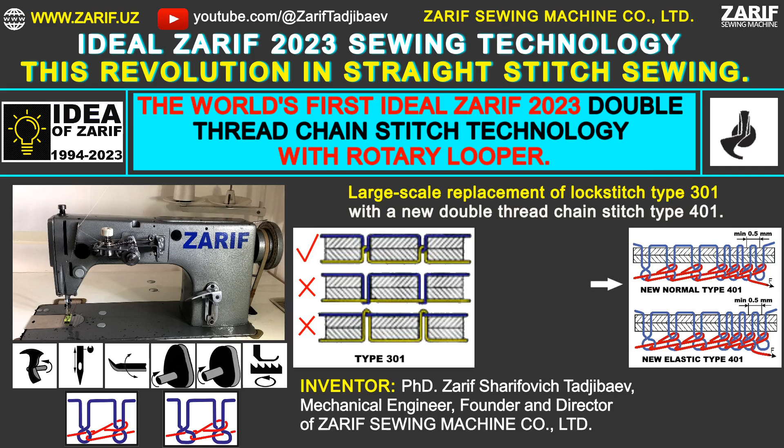Fundraising campaign to bring to market the Ideal Zarif 2023 year sewing technology that revolution in straight stitch sewing. In 1994, we revolutionized sewing technology with the creation of the Zarif double thread chain stitch technology using a rotary looper. This breakthrough was officially recognized in 2000 with US patent number 6095069. It has taken us almost 26 years to perfect this innovative technology, making it the world's first ideal solution for sewing straight stitches. To achieve this, we first developed a prototype Zarif sewing machine based on our new technology in 1997.

We modified an industrial lockstitch sewing machine, Class 1022, Orsha, Belarus, to carry out our initial trials. Through extensive testing, we identified areas for improvement and gradually improved the machine by applying our expertise. Finally, in 2023, we successfully created the world's first Ideal Zarif technology for straight stitch sewing.

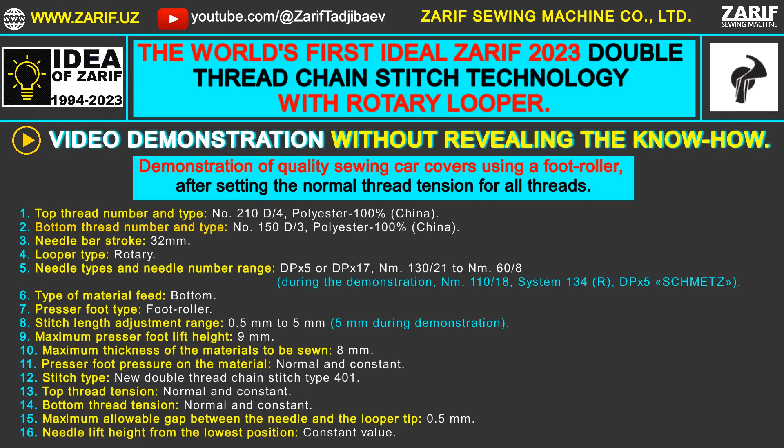Video demonstration without revealing the know-how. Demonstration of quality sewing car covers using a foot roller, after setting the normal thread tension for all threads. Our prototype of the innovative Zarif double thread chain stitch sewing machine works on the basis of our Ideal Zarif 2023 year double thread chain stitch technology with a rotary looper.

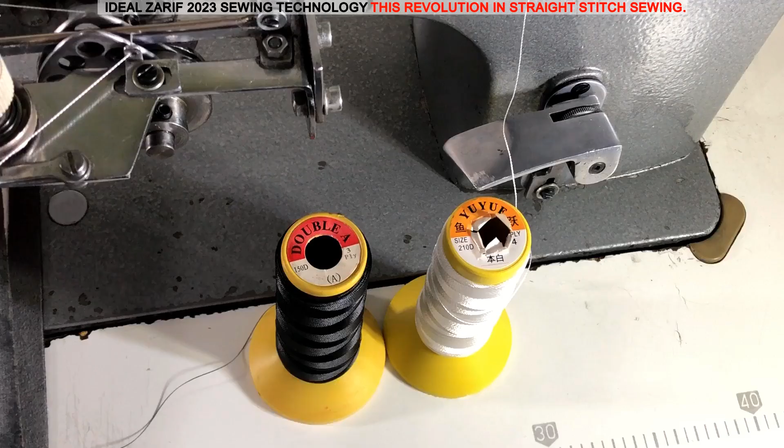For the sewing demonstration, we will be using sewing threads made in China. The main requirement is the absence of knots, as knots disrupt the stitch formation process as they cannot pass through the eye of the needle.

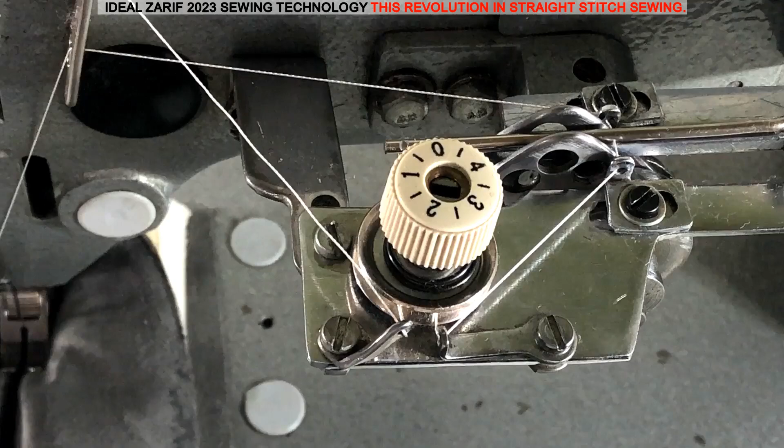During sewing, the top thread tensioner nut and the bottom thread tensioner nut, not shown, remain in a fixed position, ensuring the normal thread tension, neither too loose nor too tight.

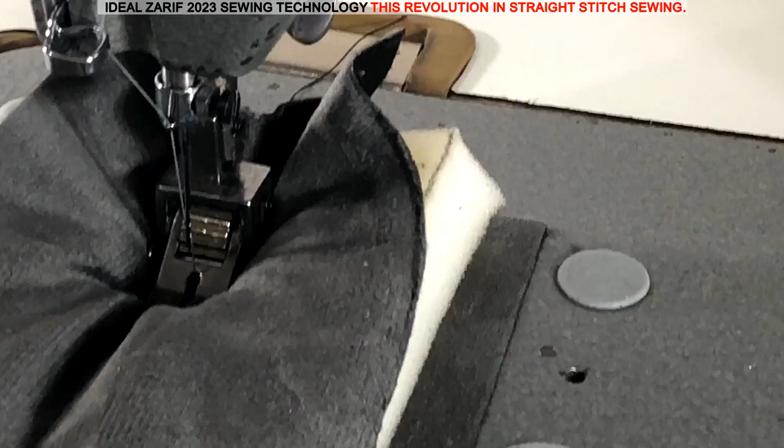In our Ideal Zarif 2023 year double thread chain stitch technology, the needle is not involved in pre-tightening the top thread loop from the previous stitch. As a result, for the first time ever, a double thread chain stitch sewing machine uses a needle with one long groove. This design offers greater resistance to bending compared to the double groove needle used in existing double thread and multi-thread chain stitch technologies.

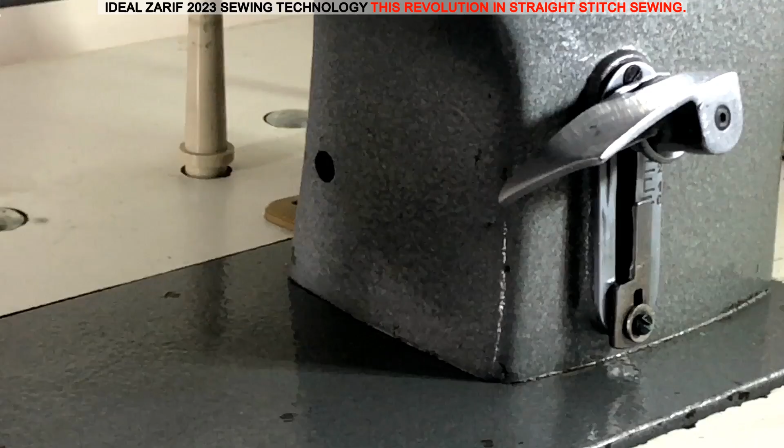Thanks to our Ideal Zarif 2023 year sewing technology, it has become possible for the first time in the world to reduce the length of the double thread chain stitch to 0.5 mm. This allows for a more secure tacking of the chain stitch seam end and prevents unraveling due to condensed stitches at a stitch length of 0.5 mm.

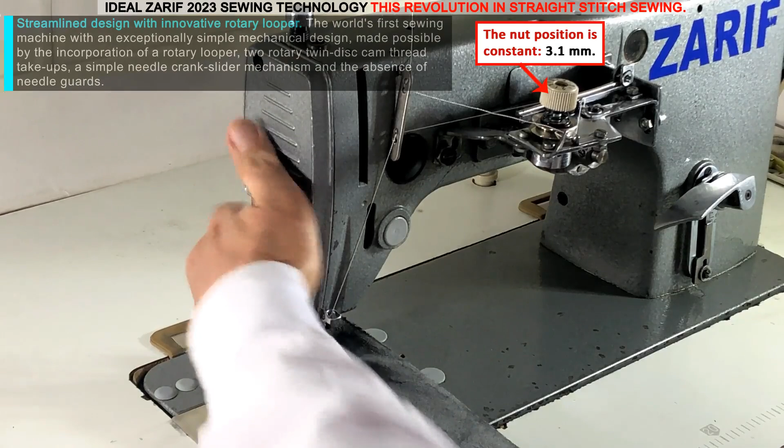Streamlined design with innovative rotary looper. The world's first sewing machine with an exceptionally simple mechanical design, made possible by the incorporation of a rotary looper, two rotary twin-disc cam thread take-ups, a simple needle crank slider mechanism, and the absence of needle guards.

One long groove needle for maximum strength. For the first time, a double-thread chain stitch sewing machine uses a needle with one long groove to produce a double-thread chain stitch type 401, which offers greater flexural strength than a needle with two long grooves used in existing double-thread and multi-thread chain stitch technologies.

Advanced capabilities for sewing thick materials. This groundbreaking sewing machine can sew materials up to 8 mm thick with a short needle bar stroke of 32 mm, thanks to our know-how.

Breakthrough in needle stability for different materials. This revolutionary sewing machine can sew different materials without needle breakage and needle point deformation, achieved by the use of a rotary looper and a needle plate with a slot for the needle, coupled with the absence of needle guards.

Easy changeover to different needle sizes. The first sewing machine to increase the maximum distance between the needle and the looper tip to 0.5 mm, making it easy to change from one needle size to another, from number 130 to #60, without having to adjust the looper in relation to the needle.

Elimination of skipped stitches and unraveling. This pioneering sewing machine, thanks to our innovative design, can sew materials without a single skipped stitch, which is critical for chain stitch seams, as all types of chain stitch seams are prone to unraveling, both at the end of the seam if not securely tacked, and from the skipped stitch back to the beginning of the seam.

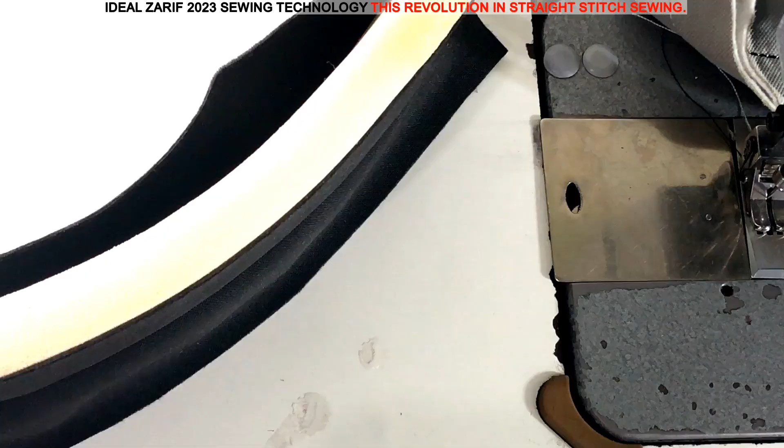For the first time in the world, we've used our know-how to achieve high-quality chain stitch seams without skipped stitches. All stitches are ideally tightened, regardless of the thickness, stiffness, or density of the material, simply by setting the normal thread tension for all threads, with no further adjustments required.

A new look for the chain stitch underside. For the first time ever, the underside of a chain stitch seam looks like a thick thread running along the seam instead of a chain. This breakthrough is made possible by our new double thread chain stitch type 401, where the top thread and bottom thread loops are rotated 180 degrees.

Quality joining of different materials without adjustments. For the first time, our advanced technology allows us to quality join materials of different thicknesses, densities, and stiffnesses with chain stitch without any adjustments during the sewing process, simply by setting the normal thread tension for all threads, thanks to our know-how. Introducing the new double thread chain stitch type 401.

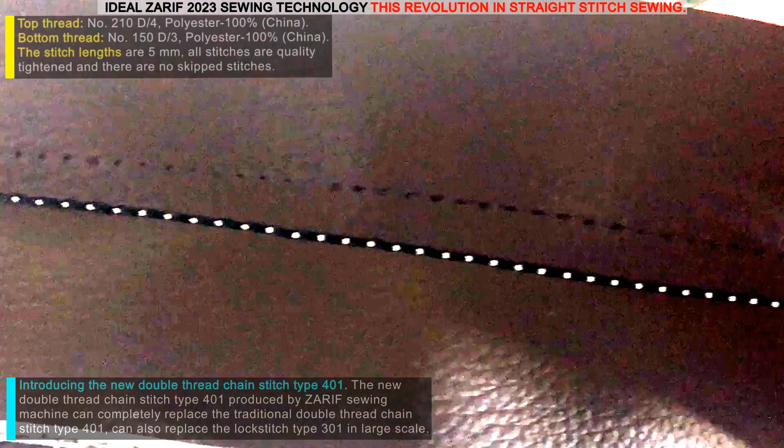The new double thread chain stitch type 401 produced by Zarif sewing machine can completely replace the traditional double thread chain stitch type 401, and can also replace the lockstitch type 301 on a large scale.

Adaptation to different materials. The world's first sewing machine that can efficiently sew a wide variety of materials with different thicknesses, densities, stiffness, and elasticity without any adjustments, as long as all threads are set to normal tension, thanks to our know-how.

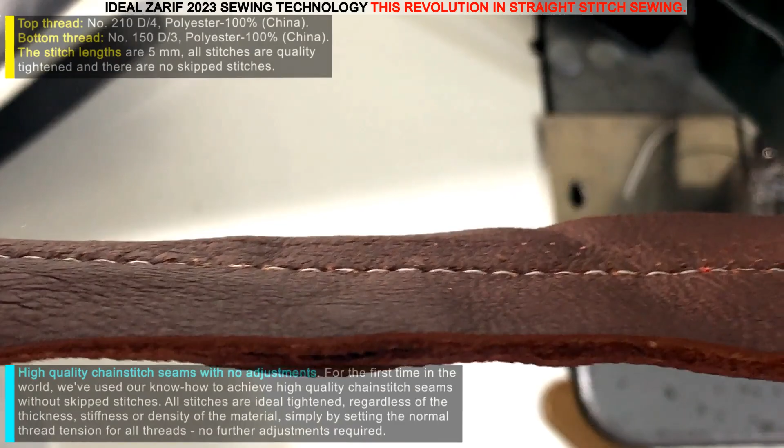High-quality chain stitch seams with no adjustments. For the first time in the world, we've used our know-how to achieve high-quality chain stitch seams without skipped stitches. All stitches are ideally tightened, regardless of the thickness, stiffness, or density of the material, simply by setting the normal thread tension for all threads, no further adjustments required.

There is not a single skipped stitch and all the stitches are very well tightened. Our new double thread chain stitch type 401, where the loops of the top and bottom threads are rotated 180 degrees. Introducing the new double thread chain stitch type 401, produced by Zarif sewing machine, which can completely replace the traditional double thread chain stitch type 401, and can also replace the lockstitch type 301 on a large scale.

There is not a single skipped stitch and all the stitches are very well tightened. Secure tacking of the chain stitch seam end. The world's first double thread chain stitch sewing machine, thanks to our know-how, makes it possible to reduce the length of the chain stitch to 0.5 mm, thus making the end of the chain stitch seam more secure against unraveling by condensing the stitches with a stitch length of 0.5 mm.

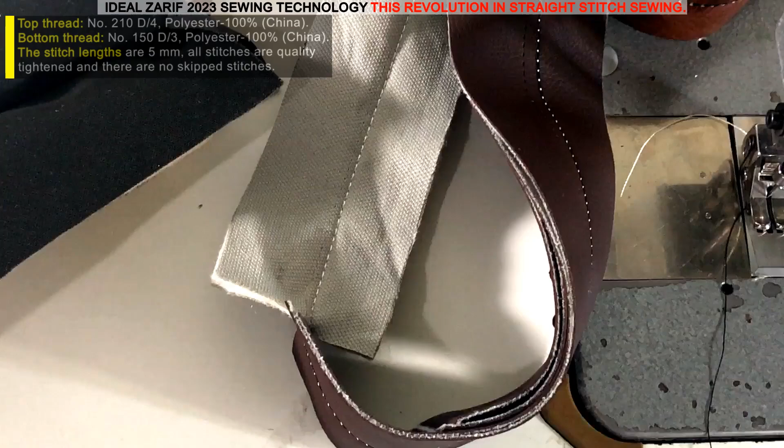For the first time, materials can be joined tightly with chain stitch. The world's first double thread chain stitch sewing machine, thanks to the application of our know-how, is able to lock the top thread loop tightly in the stitch without changing the normal thread tension, resulting in a normal stitch that ensures a tight joining of materials for the first time in the world.

Increased wear resistance of the chain stitch seam. Thanks to our know-how, the ability to lock the top thread loop tightly in the stitch not only makes it possible for the first time to join materials tightly with a double thread chain stitch, but also presses the stitch threads tightly against the surfaces of the materials being sewn, thus increasing the wear resistance of the chain stitch seam.

Tightly joined materials made easy. Thanks to our know-how, it's now possible to join different materials tightly with chain stitch seams without having to adjust the normal thread tension. This is a revolution in sewing.

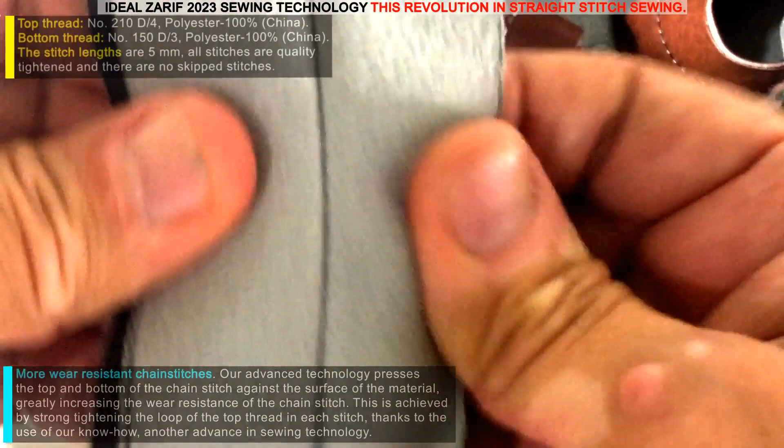More wear-resistant chain stitches. Our advanced technology presses the top and bottom of the chain stitch against the surface of the material, greatly increasing the wear resistance of the chain stitch. This is achieved by strongly tightening the loop of the top thread in each stitch, thanks to the use of our know-how, another advance in sewing technology.

For the first time, materials can be joined tightly with chain stitch. The world's first double thread chain stitch sewing machine, thanks to the application of our know-how, is able to lock the top thread loop tightly in the stitch without changing the normal thread tension, resulting in a normal stitch that ensures a tight joining of materials for the first time in the world.

Increased wear resistance of the chain stitch seam. Thanks to our know-how, the ability to lock the top thread loop tightly in the stitch not only makes it possible for the first time to join materials tightly with a double thread chain stitch, but also presses the stitch threads tightly against the surfaces of the materials being sewn, thus increasing the wear resistance of the chain stitch seam.

Tightly joined materials made easy. Thanks to our know-how, it's now possible to join different materials tightly with chain stitch seams without having to adjust the normal thread tension. This is a revolution in sewing.

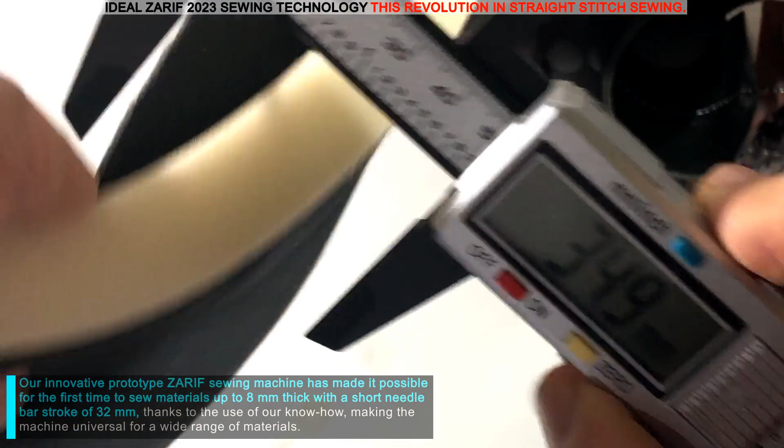There is not a single skipped stitch and all the stitches are very well tightened. Our new double thread chain stitch type 401, where the loops of the top and bottom threads are rotated 180 degrees. Our innovative prototype Zarif sewing machine has made it possible for the first time to sew materials up to 8 mm thick with a short needle bar stroke of 32 mm, thanks to the use of our know-how, making the machine universal for a wide range of materials.

The thickness of various cross-linked materials consisting of two or more layers in a compressed state.

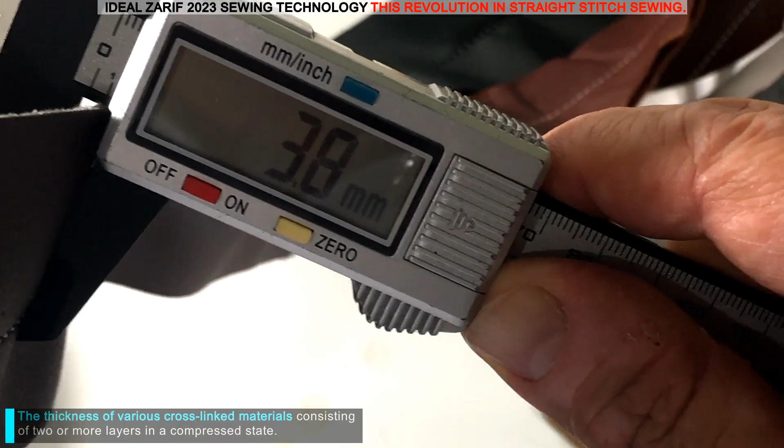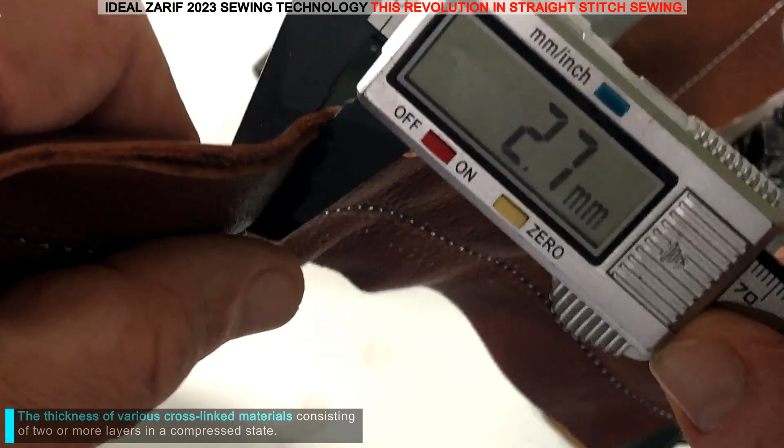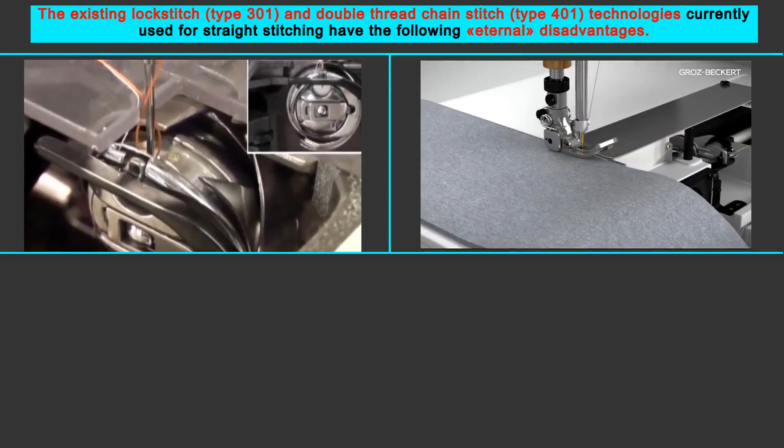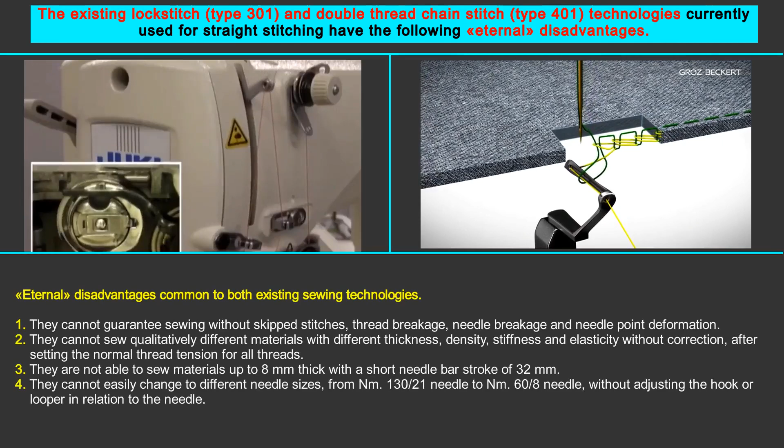The existing lockstitch (type 301) and double thread chain stitch (type 401) technologies currently used for straight stitching have the following eternal disadvantages, common to both: they cannot guarantee sewing without skipped stitches, thread breakage, needle breakage and needle point deformation.

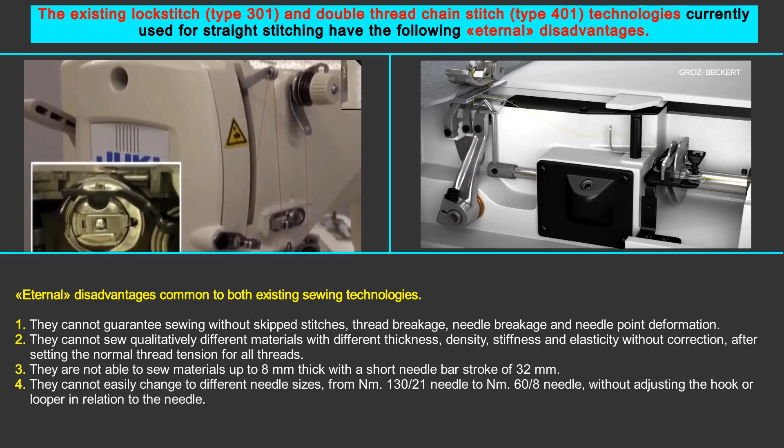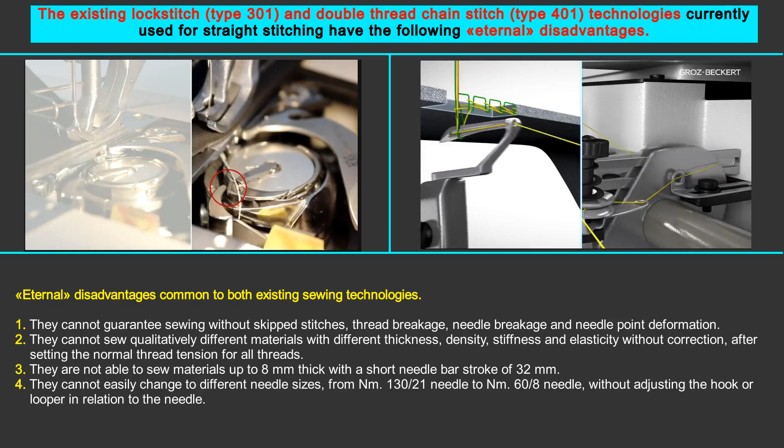They cannot sew qualitatively different materials with different thickness, density, stiffness and elasticity without correction after setting the normal thread tension for all threads. They are not able to sew materials up to 8 mm thick with a short needle bar stroke of 32 mm. They cannot easily change to different needle sizes, from number 130 needle to number 60 needle, without adjusting the hook or looper in relation to the needle.

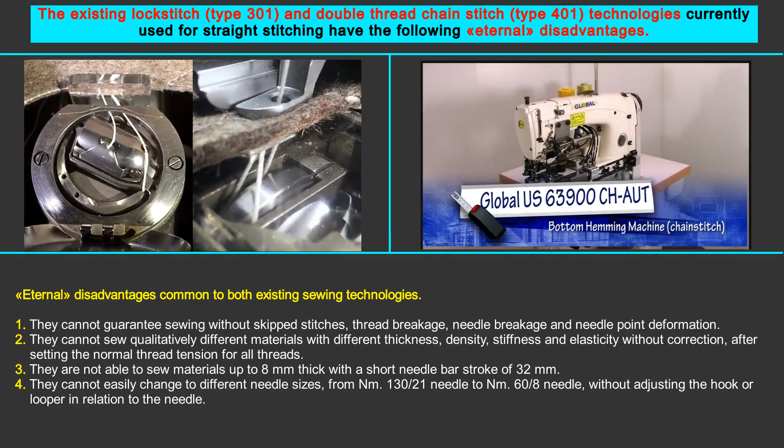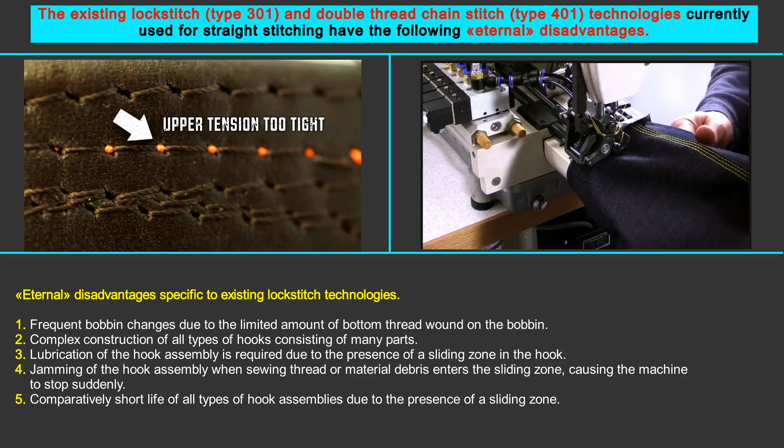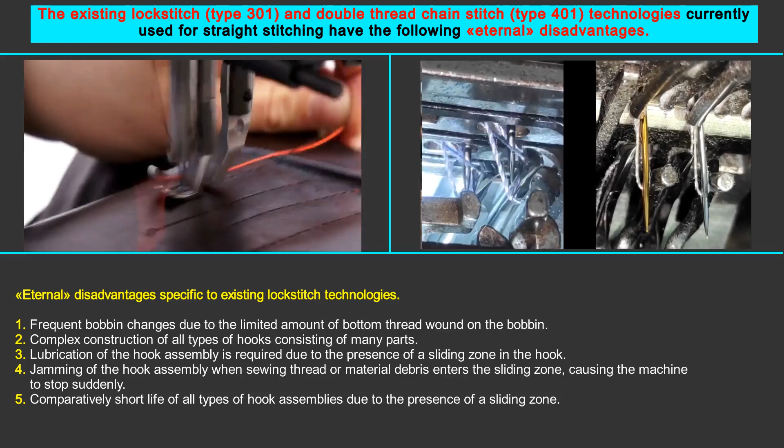Eternal disadvantages specific to existing lockstitch technologies: frequent bobbin changes due to the limited amount of bottom thread wound on the bobbin; complex construction of all types of hooks consisting of many parts; lubrication of the hook assembly is required due to the presence of a sliding zone in the hook; jamming of the hook assembly when sewing thread or material debris enters the sliding zone, causing the machine to stop suddenly; and comparatively short life of all types of hook assemblies due to the presence of a sliding zone.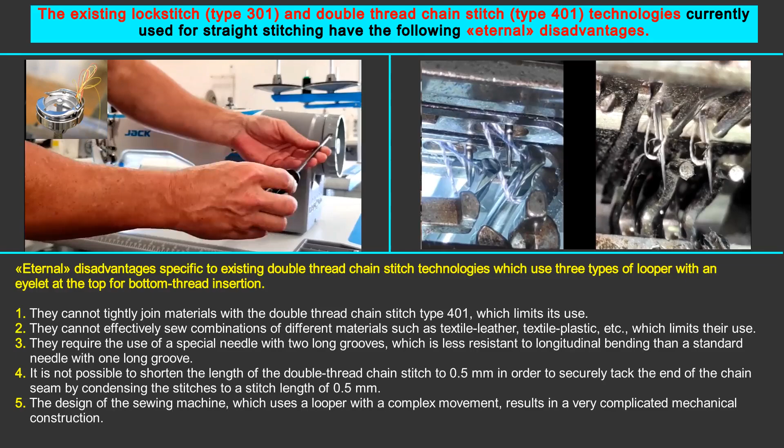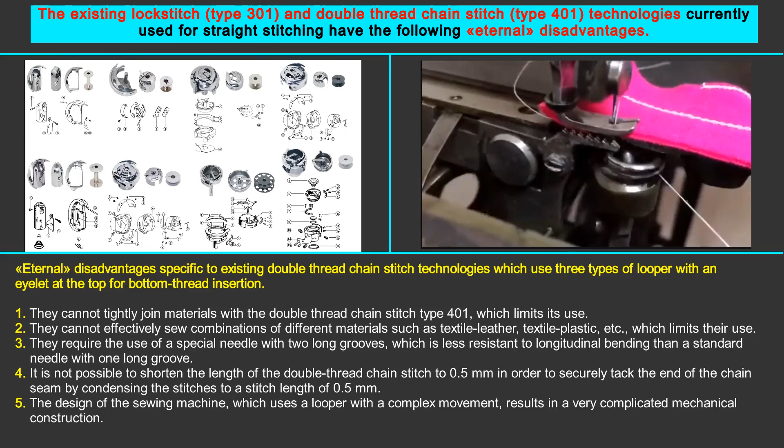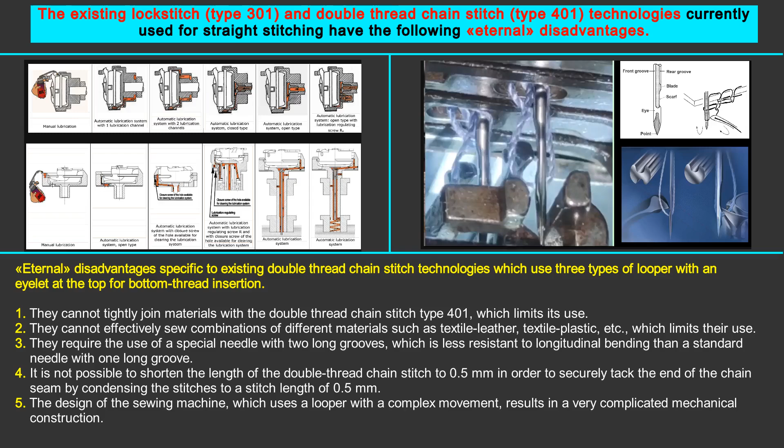Eternal disadvantages specific to existing double thread chain stitch technologies, which use 3 types of looper with an eyelet at the top for bottom thread insertion: they cannot tightly join materials with the double thread chain stitch type 401, which limits its use. They cannot effectively sew combinations of different materials, such as textile-leather, textile-plastic, etc., which limits their use. They require the use of a special needle with 2 long grooves, which is less resistant to longitudinal bending than a standard needle with 1 long groove.

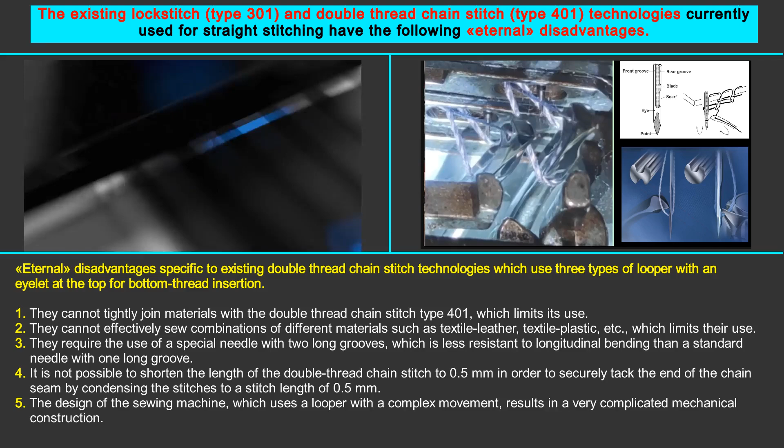It is not possible to shorten the length of the double thread chain stitch to 0.5 mm in order to securely tack the end of the chain seam by condensing the stitches to a stitch length of 0.5 mm. The design of the sewing machine, which uses a looper with a complex movement, results in a very complicated mechanical construction.

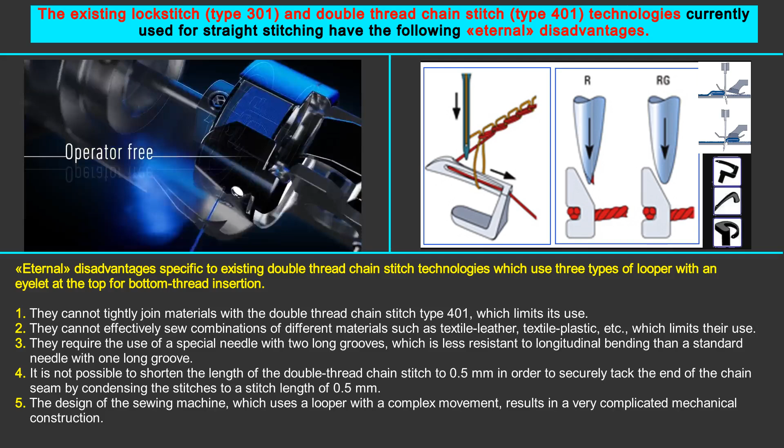Our ideal Zarif 2023 double thread chain stitch technology has revolutionized sewing machine design and straight stitch sewing. For the first time, a rotary looper is used to form a double thread chain stitch, resulting in the world's first new double thread chain stitch type 401, where the top and bottom thread loops are rotated 180 degrees.

For the first time, an ordinary needle with a single long groove is used to form a double thread chain stitch, as the needle does not participate in the pre-tightening of the top thread loop placed in the previous stitch. For the first time, materials up to 8 mm thick can be sewn with a needle bar stroke of 32 mm. For the first time, it is possible to sew materials of different thickness, density, stiffness, and elasticity without any adjustments, by setting the normal tension for all threads.

For the first time, it is possible to sew without skipped stitches, thread breakage, and needle point deformation, provided the thread is free of knots and the needle size matches the material being sewn.

For the first time, using our know-how, it is possible to tightly pull the top thread loop in a stitch to achieve a dense material join, or to loosely pull the top thread loop in a stitch to get smooth seams on light materials and elastic seams in stretchable materials, without adjusting normal thread tension.

For the first time, the maximum allowable gap between the needle and the tip of the looper has been increased to 0.5 mm, allowing an easy transition from a number 130 needle to a number 60 needle without adjusting the looper relative to the needle. For the first time, high stitch formation reliability has been achieved without the use of needle guards.

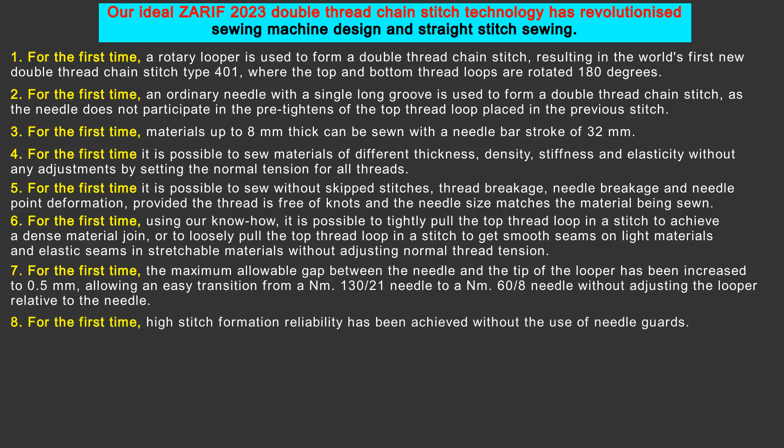For the first time, the length of the double thread chain stitch can be reduced to 0.5 mm, allowing the end of the chain stitch seam to be more securely tucked against unraveling by condensing the stitches with a stitch length of 0.5 mm. For the first time, it is possible to develop different types of sewing machines, with different types of platforms and different types of material feed, with a very simple mechanical design that operates with high reliability and long service life.

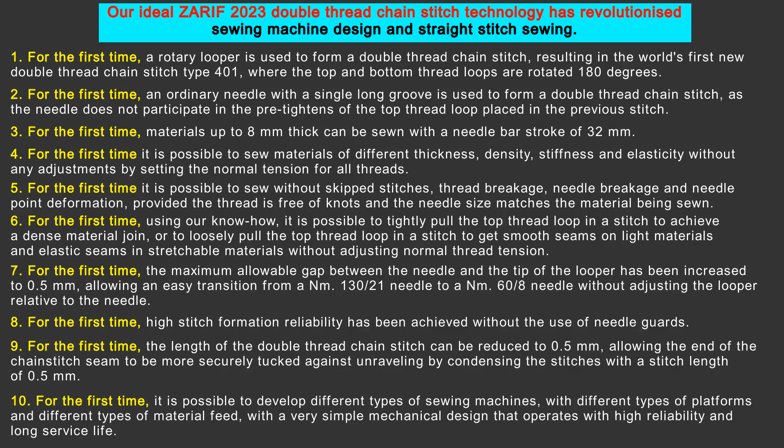History of Zarif double thread chain stitch technology with rotary looper: in 1994, we came up with the idea of creating a double thread chain stitch type 401 using a rotary looper. We applied for a patent for this new Zarif double thread chain stitch technology, and in 2000 US patent number 6095069 was granted.

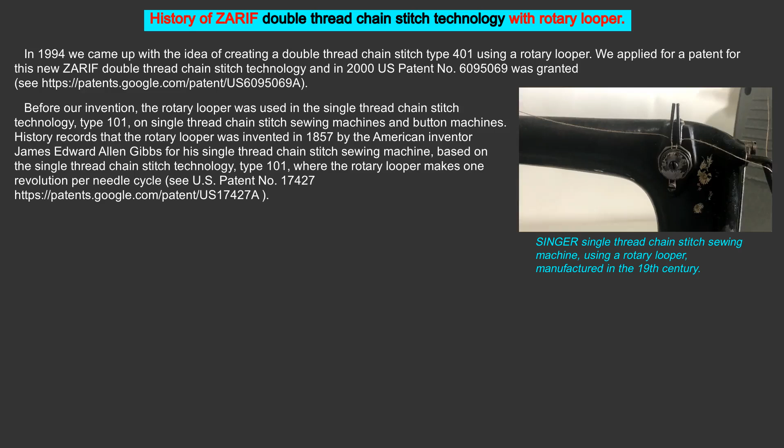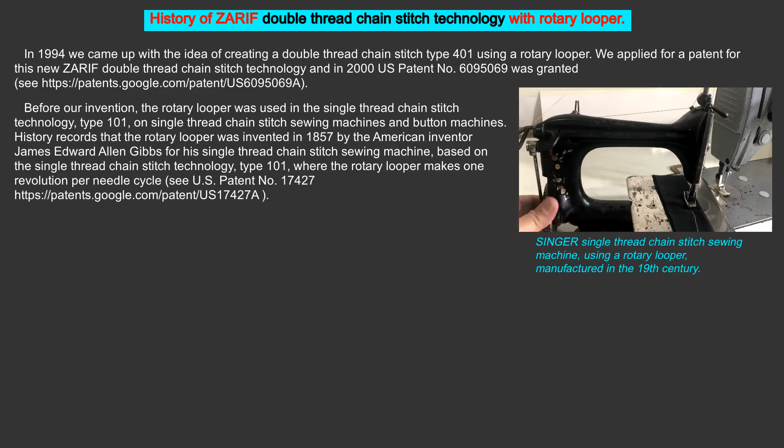Before our invention, the rotary looper was used in the single thread chain stitch technology, type 101, on single thread chain stitch sewing machines and button machines. History records that the rotary looper was invented in 1857 by the American inventor James Edward Allen Gibbs for his single thread chain stitch sewing machine, based on the single thread chain stitch technology, type 101, where the rotary looper makes 1 revolution per needle cycle. See US patent number 17427.

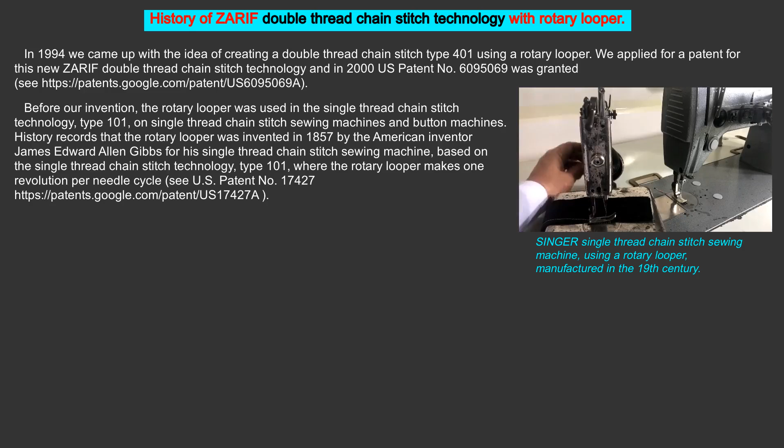A rotary looper is a unique and the only tool in sewing technology that can rotate loops of thread around its body by turning them 180 degrees with its tail.

As is known, the rotary looper is made in one piece and has 3 zones: the head zone with a front tip to catch the thread and a rear tip to release the thread loop from the body of the looper, the tail zone for rotating the thread loop through 180 degrees, and the shaft zone for attaching the looper to the machine.

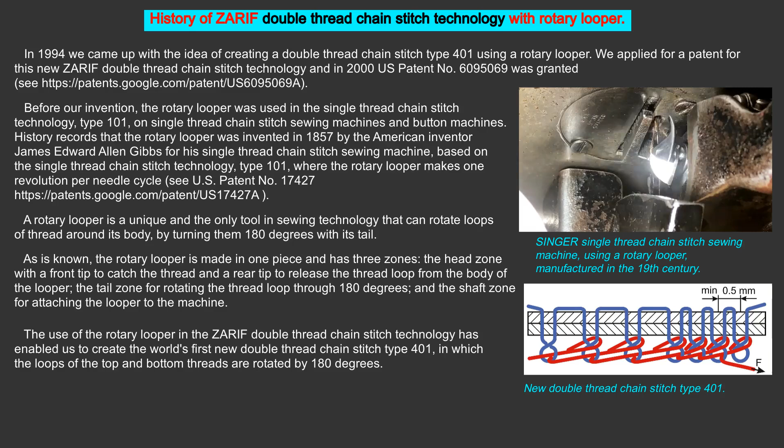The use of the rotary looper in the Zarif double thread chain stitch technology has enabled us to create the world's first new double thread chain stitch type 401, in which the loops of the top and bottom threads are rotated by 180 degrees. The Zarif double thread chain stitch technology forms a double thread chain stitch type 401, where the rotary looper makes 2 revolutions per needle cycle.

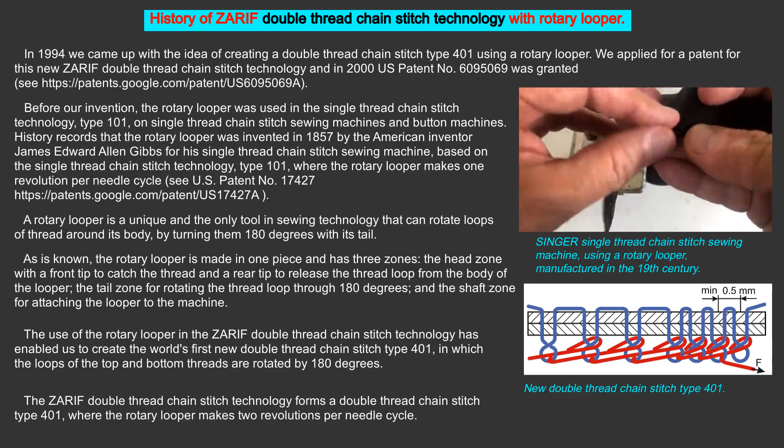Zarif double thread chain stitch technology with rotary looper, invented by us in 1994. See US patent number 6095069.

In the Zarif double thread chain stitch technology, the top thread is fed to the looper by a needle with a vertical reciprocating motion, as is usually done. To feed the bottom thread to the looper, a bottom thread pusher is used, which makes oscillating movements in the horizontal plane. Since the rotary looper can loop thread around its body in the form of a loop...

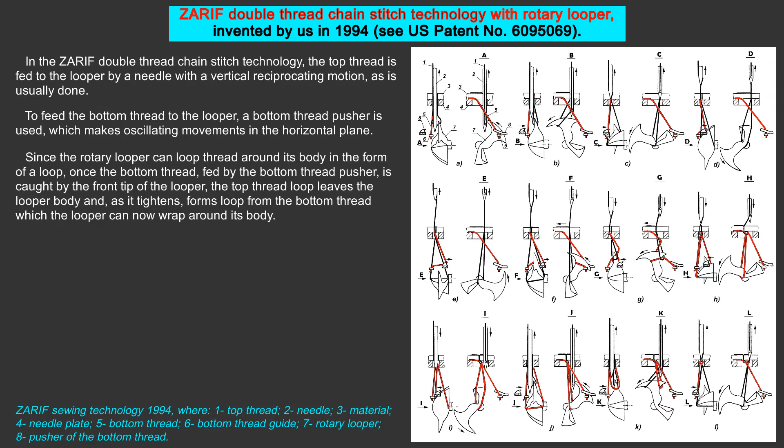...once the bottom thread, fed by the bottom thread pusher, is caught by the front tip of the looper, the top thread loop leaves the looper body and, as it tightens, forms a loop from the bottom thread which the looper can now wrap around its body. As the rotary looper only uses a small length of the thread loops and the thread loops are released from the rear tip of the looper, the thread loops can be tightened very smoothly.

Therefore, the Zarif double thread chain stitch technology uses 2 rotary twin disc cam thread take-ups to feed and tighten both the top and bottom threads, with each thread being controlled separately.

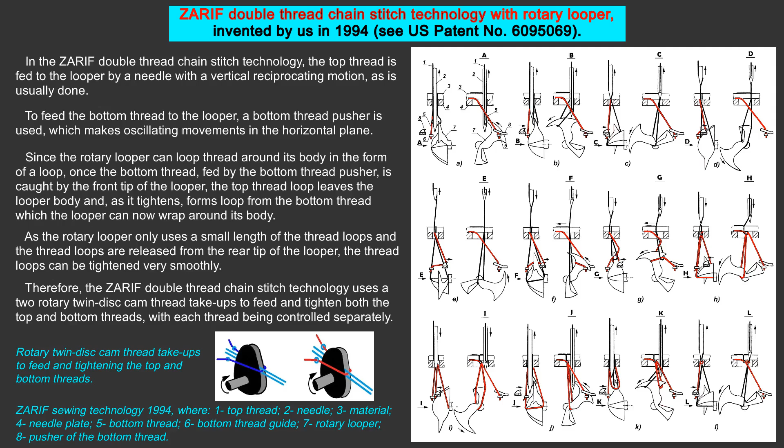History of the prototype development of the Zarif sewing machine based on Zarif double thread chain stitch technology with a rotary looper. In 1997, we decided to build a prototype sewing machine to test our new Zarif double thread chain stitch technology with a rotary looper, which we had invented in 1994.

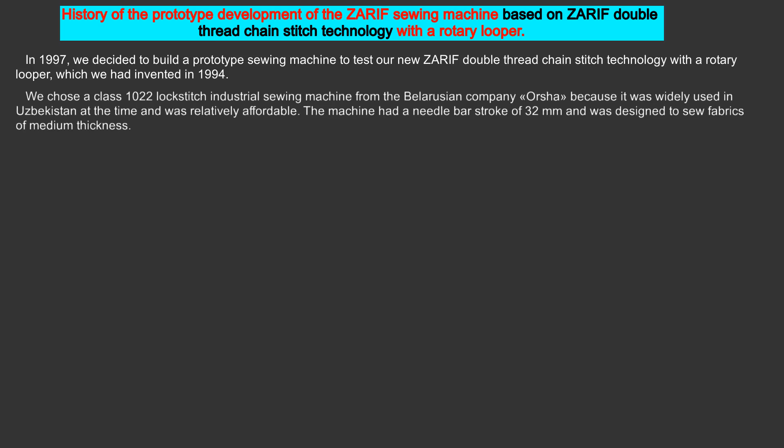We chose a Class 1022 lockstitch industrial sewing machine from the Belarusian company Orsha because it was widely used in Uzbekistan at the time and was relatively affordable. The machine had a needle bar stroke of 32 mm and was designed to sew fabrics of medium thickness.

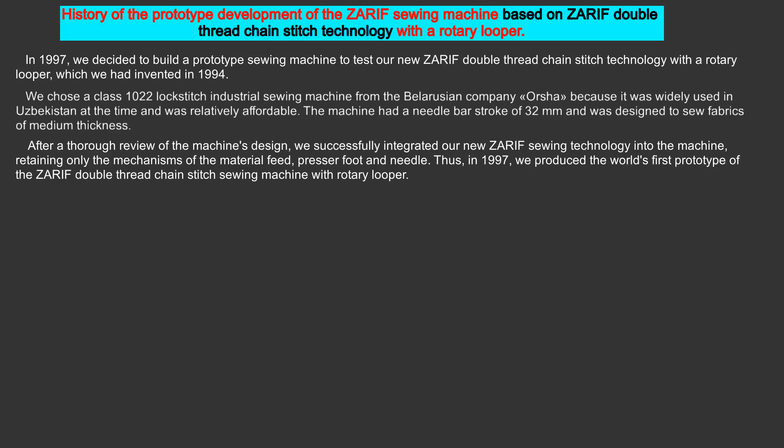After a thorough review of the machine's design, we successfully integrated our new Zarif sewing technology into the machine, retaining only the mechanisms of the material feed, presser foot, and needle. Thus, in 1997, we produced the world's first prototype of the Zarif double thread chain stitch sewing machine with rotary looper. Trials on a prototype Zarif sewing machine allowed us to identify some of the shortcomings of our new Zarif double thread chain stitch technology developed in 1994.

We then set ourselves the goal of improving our new Zarif sewing technology until it became the world's first ideal technology for straight stitch sewing.

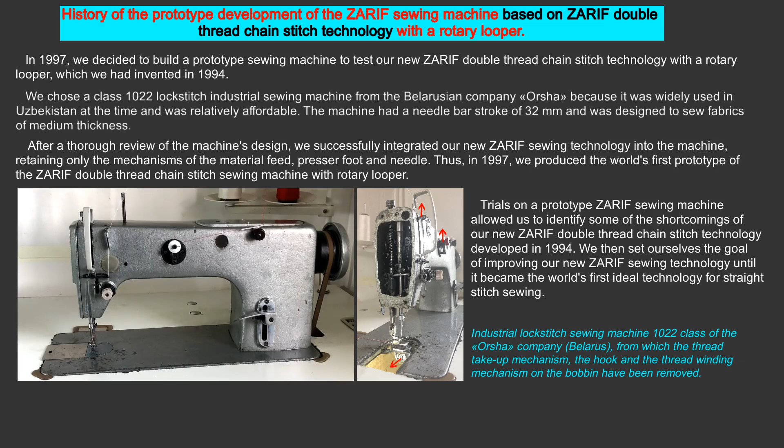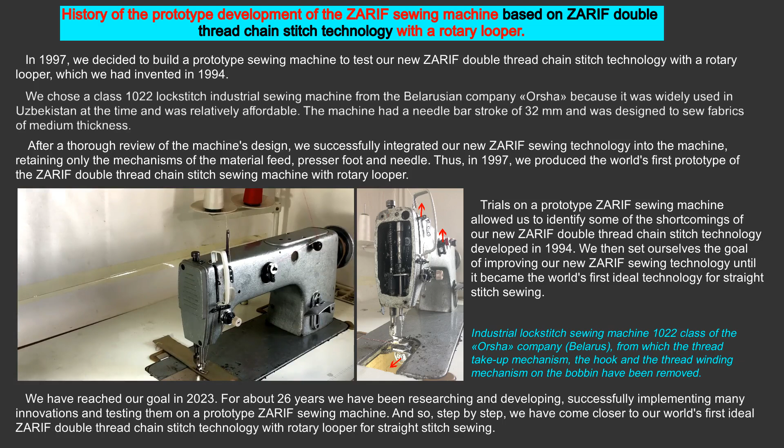We have reached our goal in 2023. For about 26 years we have been researching and developing, successfully implementing many innovations and testing them on a prototype Zarif sewing machine. And so, step by step, we have come closer to our world's first ideal Zarif double thread chain stitch technology with rotary looper for straight stitch sewing.

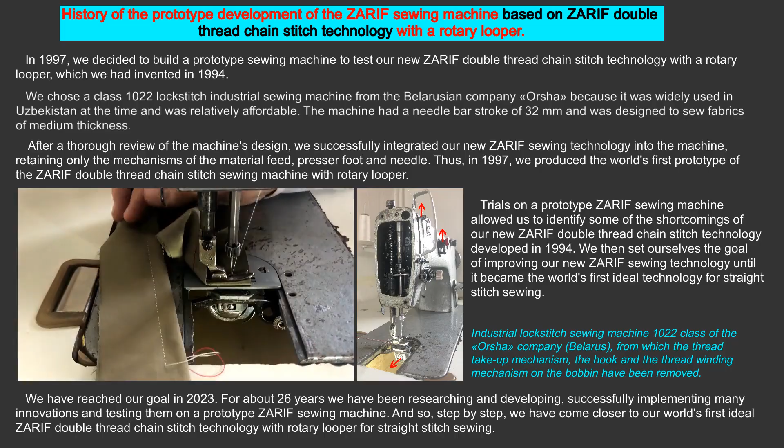Stitch type, working units, and technical specifications of the prototype Zarif sewing machine based on the ideal Zarif 2023 year double thread chain stitch technology with rotary looper.

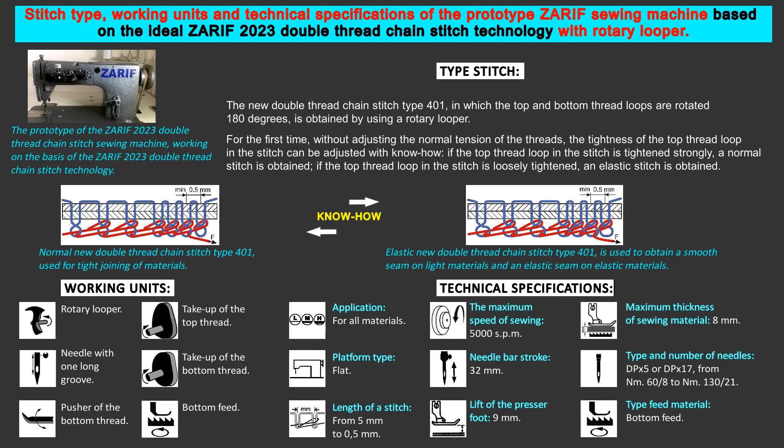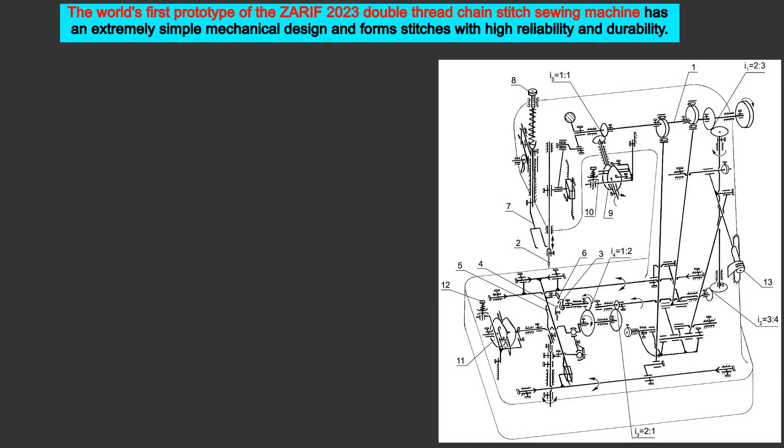The world's first prototype of the Zarif 2023 double thread chain stitch sewing machine has an extremely simple mechanical design and forms stitches with high reliability and durability. The use of three rotary working units in the machine—the rotary looper and two rotary thread take-ups—together with a simple crank slider mechanism for the needle and the absence of needle guards, has made it possible to create the world's first prototype of the Zarif sewing machine with a very simple mechanical design.

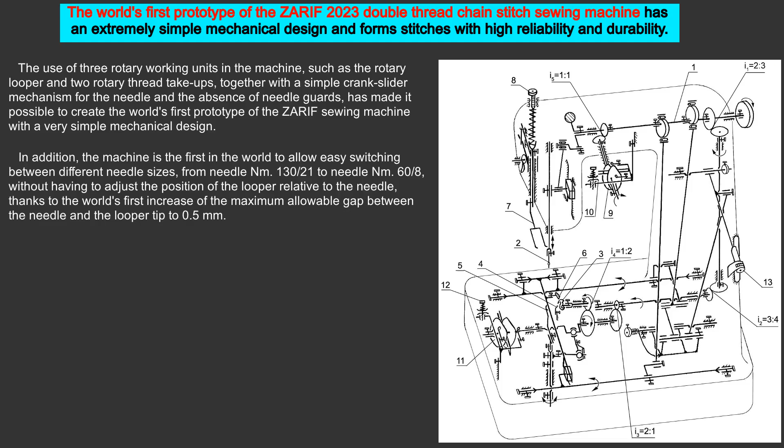In addition, the machine is the first in the world to allow easy switching between different needle sizes, from needle number 130 to needle number 60, without having to adjust the position of the looper relative to the needle, thanks to the world's first increase of the maximum allowable gap between the needle and the looper tip to 0.5 mm.

In addition, the machine is very easy to maintain, as all working units are mounted on the ends of the shafts and can be removed without dismantling other parts of the machine.

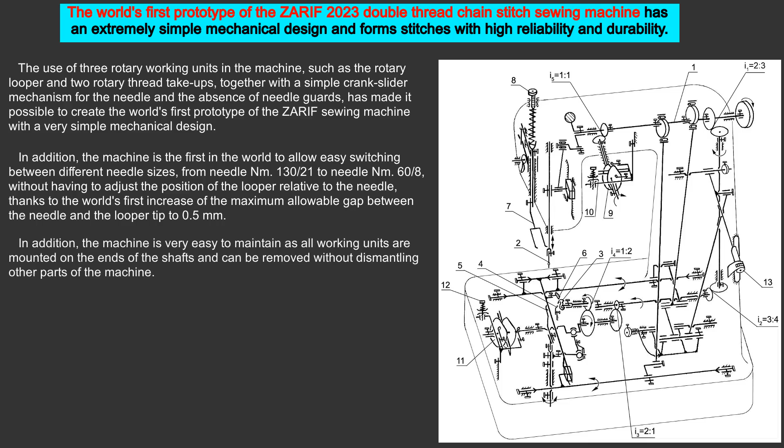Kinematic diagram of the prototype Zarif 2023 double thread chain stitch sewing machine.

Our automatic thread trimming technology for the Zarif double thread chain stitch technology with rotary looper. It is well known that most modern industrial sewing machines are equipped with automatic thread trimming, and all automated sewing systems require automatic thread trimming. With this in mind, we have long been researching and developing automatic thread trimming technology for our Zarif double thread chain stitch technology with rotary looper.

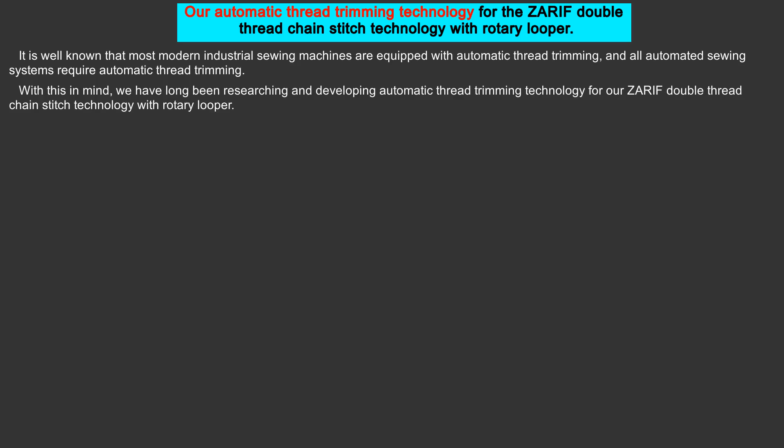Thanks to these efforts, we successfully invented the automatic thread trimming technology for our Zarif double thread chain stitch technology with rotary looper in 2020, and further improved it in 2021 and 2023. The advanced version, invented in 2023, has not yet been physically manufactured to ensure its practical functionality. However, the drawings of our automatic thread trimming technology prove that it works in theory.

At present we cannot disclose the details of our automatic thread trimming technology, as it is not yet patented. However, we can say that the top and bottom threads are trimmed under the needle plate, with the bottom thread end remaining clamped under the needle plate after trimming. This eliminates the need to rethread the bottom thread when moving to the next sewing operation.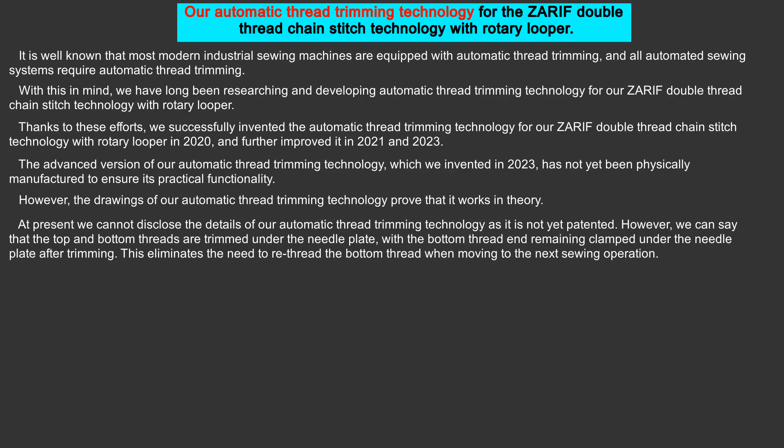If the sewing process is finished with condensed stitches of 0.5 mm stitch length and manual thread trimming, the resulting chain stitch seam will be difficult to unravel from the end of the seam. If the sewing process is finished with condensation stitches at a stitch length of 0.5 mm and with automatic thread trimming, the resulting chain stitch seam cannot be unraveled from the end of the seam, as the end of the top thread passes through the last loop of the bottom thread.

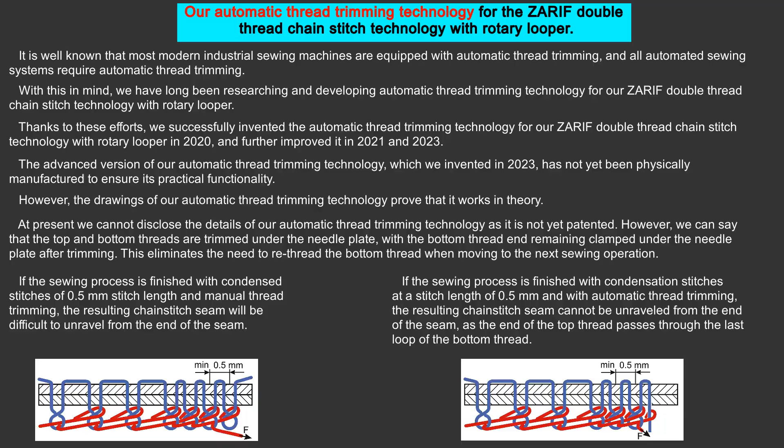Our ideal Zarif 2023 double thread chain stitch technology with rotary looper opens a new era in the development of automated straight stitch sewing. It is well known that the future of mass production in various sewing industries is closely linked to automation, and the automation of sewing processes plays an important role in this transformation.

Currently, some sewing operations are already being automated using robotic manipulator-controlled sewing systems. In the future, these robotic manipulators may be replaced by more advanced humanoid robots.

When it comes to automated sewing, it is essential that the process is performed to a high standard, ensuring there are no skipped stitches, thread breakage, needle breakage, or deformation of the needle point. Efficient sewing of different materials without the need for adjustments is also critical to the automation of the sewing process.

Our ideal Zarif 2023 double thread chain stitch technology with rotary looper for straight stitch sewing is the perfect solution to meet all these requirements. Our prototype Zarif sewing machine has proven this in practice, but only when the material is fed in one direction.

This allows us to create different automatic sewing systems based on this technology, where the material is fed in a single direction. However, there are many sewing operations where the stitch must follow a complex path. In such cases, stitch formation must be independent of the material feed direction.

With this in mind, we have been working for a long time to develop a device that would allow our Zarif double thread chain stitch technology with rotary looper to produce stitches regardless of the direction of material feed. As a result of our efforts, we were able to invent this device in 2020, improve it in 2021, and complete the final refinements in 2023. Although we have not yet built and tested the device, our drawings show that it theoretically works.

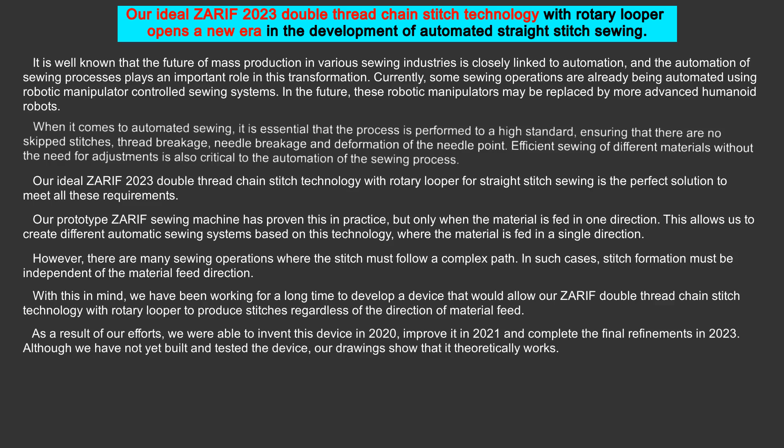Patent protection for our inventions that we invented in 2023. We intend to secure patents in several countries around the world for all our inventions developed in 2023, including the ideal Zarif double thread chain stitch technology with rotary looper, automatic thread trimming technology, and the device that allows stitch formation with material feed in any direction.

Advantages and disadvantages of lockstitch type 301 and double thread chain stitch type 401.

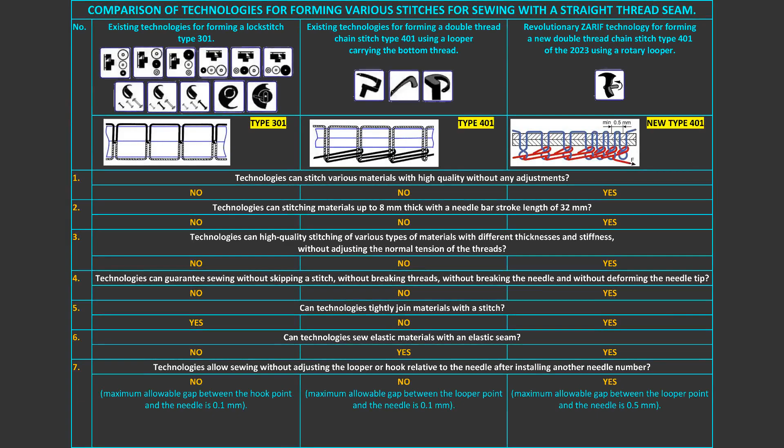Comparison of technologies for forming various stitches for sewing with a straight seam.

Application of the revolutionary ideal Zarif 2023-year double thread chain stitch technology with a rotary looper that forms stitches in only one direction. Our prototype Zarif sewing machine, based on this technology, has proven its ability to perform straight stitching with material feed in only one direction.

This technology supports a stitch length ranging from 0.5 mm to 5 mm. In addition, we have developed a technical solution that allows the stitch length to be increased to 10 mm.

Based on our ideal Zarif 2023-year double thread chain stitch technology, which forms stitches in only one direction, the following machines can be designed and manufactured: various industrial sewing machines with different types of platforms and material feed mechanisms.

Various automated sewing systems with material feed in one direction only, and a range of programmable automatic pattern sewing machines with a 360 degrees rotating head that can feed material in any direction to create complex stitch patterns.

Application of the revolutionary ideal Zarif 2023-year double thread chain stitch technology with a rotary looper, forming stitches in any direction. If the device we invented in 2023, which enables this technology to form stitches with material feed in any direction, works successfully in practice, the following automated machines can be designed and manufactured on its basis.

This would enable the production of complex stitch patterns, including various conventional programmable automatic pattern sewing machines without a 360-degree rotating head, various automated sewing systems, and single and double head quilting machines.

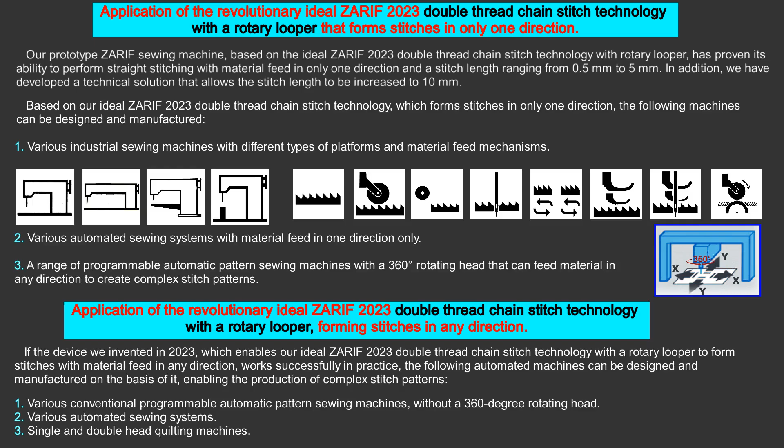Can our revolutionary ideal Zarif 2023-year double thread chain stitch technology with a rotary looper become obsolete in the future? We are confident this will not happen. Our confidence is based on the following undeniable facts.

The eternal disadvantages of the existing sewing technologies currently used for straight stitch sewing, such as the lockstitch type 301 and the double thread chain stitch type 401, prevent them from becoming the ideal solution for straight stitch sewing, no matter how much they evolve in the future.

Furthermore, the invention of an ideal straight stitch sewing technology can only be achieved by creating a new double thread chain stitch technology that eliminates the eternal disadvantages of existing sewing technologies.

Since it is technically impossible to invent an ideal straight stitch sewing technology by developing a new lockstitch technology without using a hook, the task of inventing a new double thread chain stitch technology and making it the ideal solution for straight stitch sewing is a very challenging one.

All previous attempts to invent a new double thread chain stitch technology and make it the ideal solution for straight stitch sewing were unsuccessful. For example, the new double thread chain stitch technology using a special hook, see US patent number 3811392, 1974, was never commercialized.

We believe that any new double thread chain stitch technology using a special hook cannot become an ideal solution for sewing due to the complexity of the special hook design and the need for lubrication.

We were the first in the world to invent the new Zarif double thread chain stitch technology with rotary looper in 1994, which was granted US patent number 6095069 in 2000.